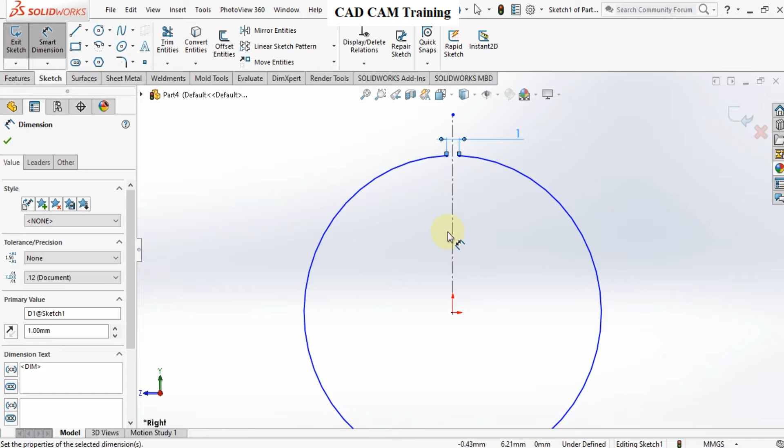Choose the smart dimension, this point and this point to 1 mm. And radius of the arc 50 mm. And stretch the center line like this.

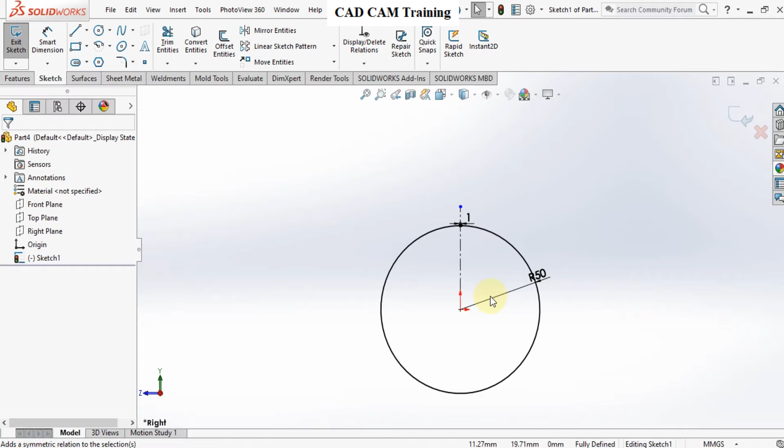And make it vertical. Now choose these 2 points and the center line and make them symmetric. Go to sheet metal, base flange, and extrude it up to 50 mm.

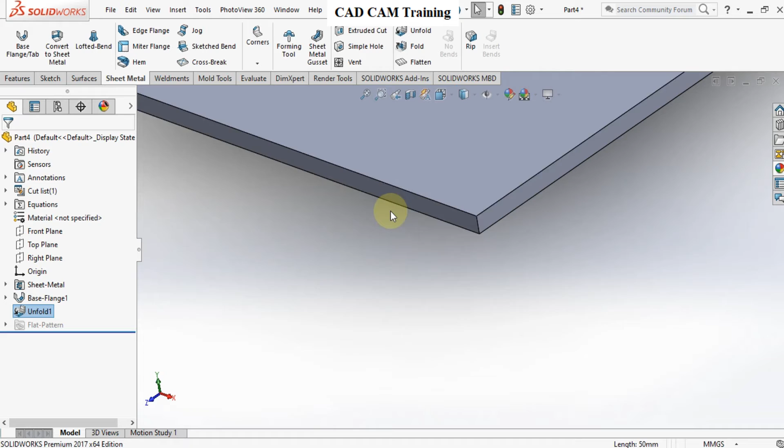Go to the unfold command, choose this edge and this face. OK. Right-click on this face, sketch, and make it normal. Draw a corner rectangle like this.

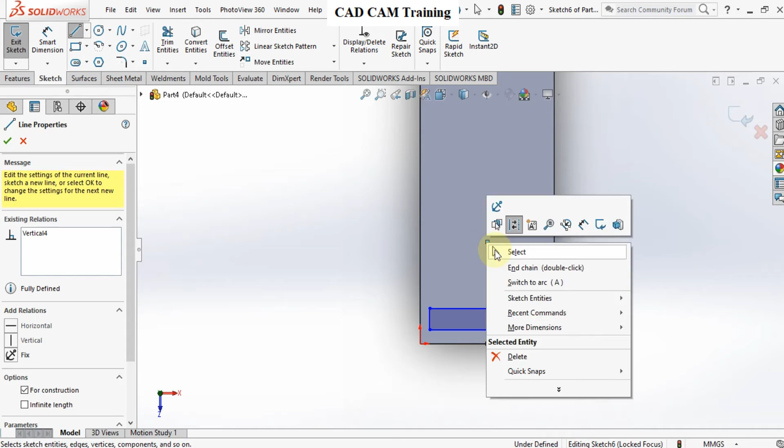Choose the center line, and draw it from the center point like this. Choose the smart dimension, this line and this line, to 7 mm. This line 40 mm. And this line 6 mm.

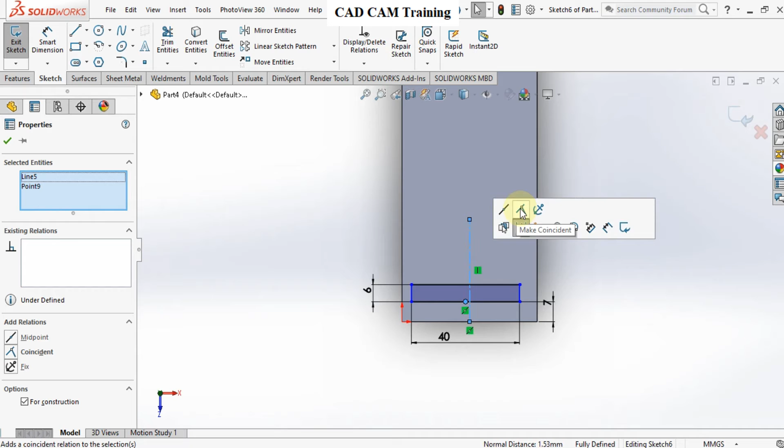Now choose the center point of the rectangle and center line and make them coincident. Choose the fillet command, select all the edges of the rectangle. Radius 2 mm. OK.

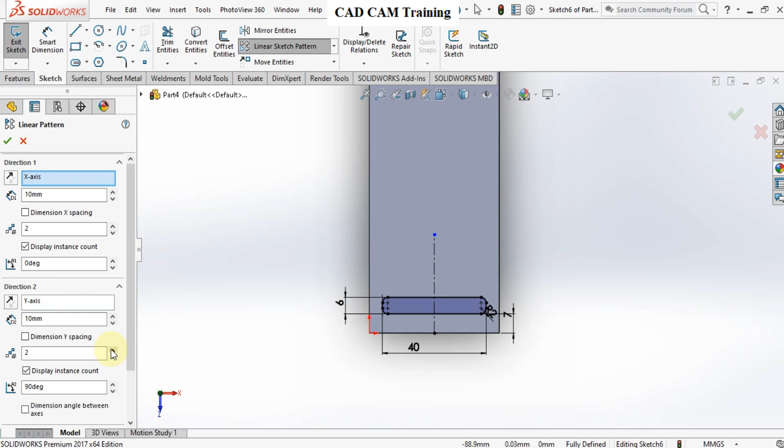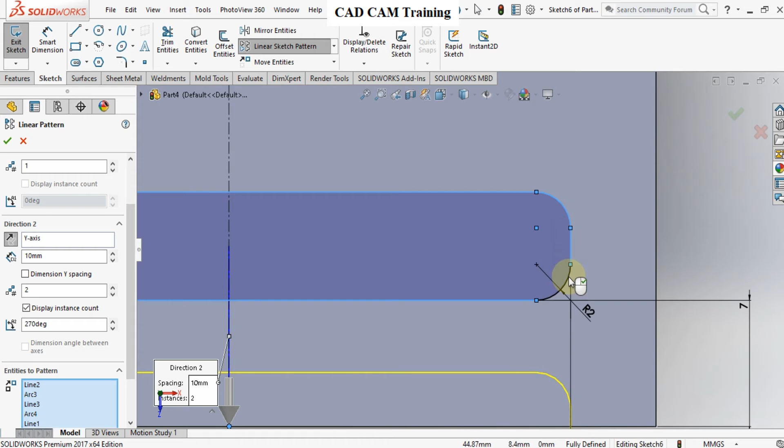Choose the linear pattern. Select all the edges of the rectangle. Reverse the direction. Pattern 20 entities. Choose the smart dimension, this line and this line to 10 mm.

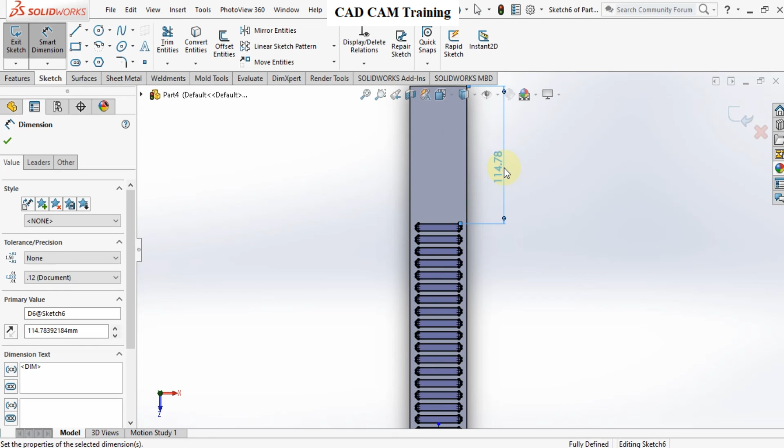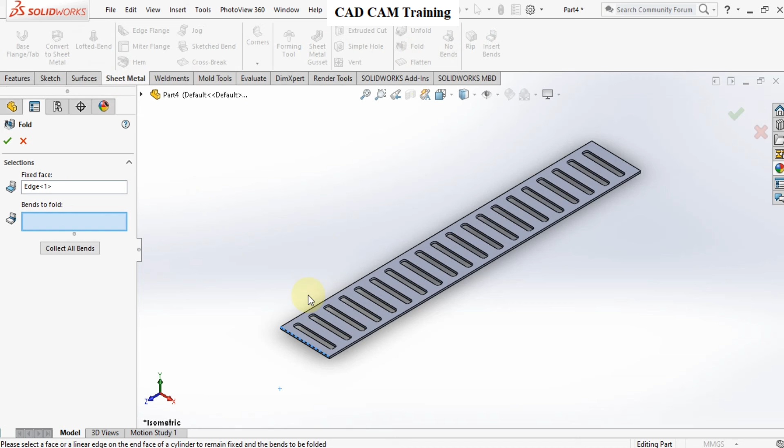Go to Features, Extrude Cut, and extrude cut it to through all. OK. Go to sheet metal, fold command, and select this face. OK.

Go to Appearance, Metal, Steel, and double-click on the polished steel. Our design is ready.